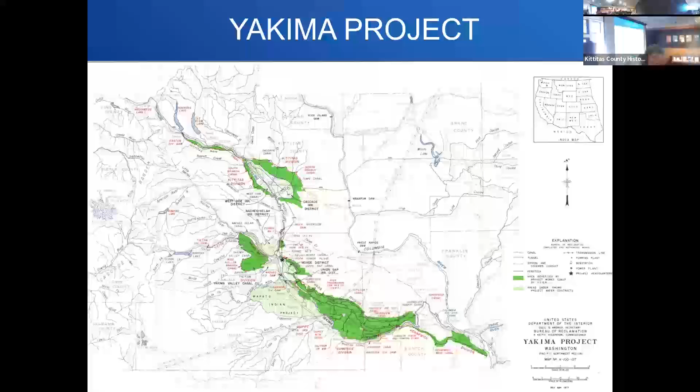The first one was the Newlands Project, hence the name of the document. But there were quite a few those first few years, and one of those was the Yakima Project, which was approved in 1905, but it took over 50 years to complete. It was completed in 1958.

As I mentioned, 6 irrigation divisions: Tieton and Sunnyside, Kittitas, Roza, Kennewick, and a storage division, which proposed 6 dam reservoirs.

And this project was the largest in Washington State prior to the Columbia Basin project, which is huge. It was planned to be 2 million acres, not that much now, but it is.

And when they built the Northern Pacific Railway coming through here on the Cascade Branch, which goes over Stampede Pass, they encountered a bunch of sub-irrigation canals and whatnot in the area around the lower Yakima Valley, right there where Union Gap is. And I know they use them here.

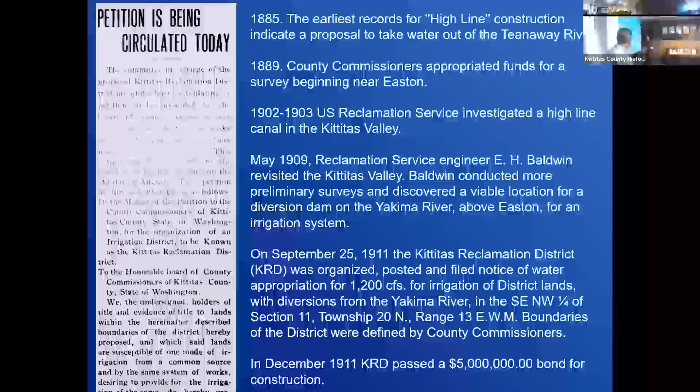On October 3rd, 1911, KRD hires Frank Kelsey to survey an irrigation system and provide engineering data and cost estimates, culminating in a report outlining the plan on March 15th, 1913. Frank Kelsey, from Portland, Oregon, came up here and surveyed all around. In anticipation of building this irrigation system, the KRD passed a $5 million bond for construction—think about that, $5 million in 1911, a lot more money than today. They voted 355 for the bonds and 24 against the proposed issue.

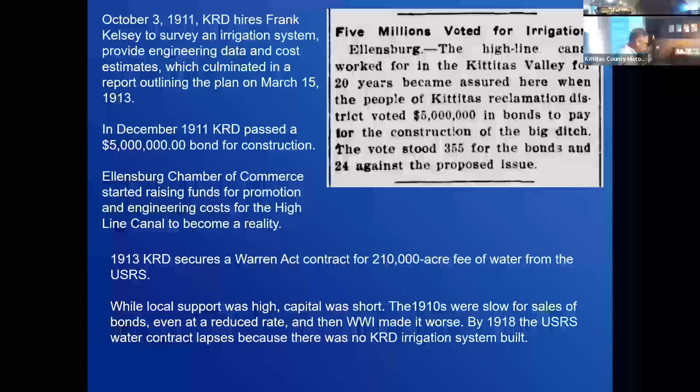Now, it'd be someone who was a government historian, I kind of know some of these things. So this Warren Act contract here, what this means is this is a private irrigation district that can contract for water from the federal government. By this time, they had Kachess Dam built, working on it, so they could secure water. It wasn't only for reclamation-built systems; people could contract with them, but they had to build a system, and they didn't, so it lapsed.

So what's the Kittitas Reclamation District to do now? They tried really hard. I want to implore you to realize how much the Chamber of Commerce did. They were continually fighting, doing publications, trying to raise money. I've never seen a Chamber of Commerce be so active in trying to get involved in the irrigation district to make it happen. But they just kept coming up short.

So in 1918, the Kittitas Reclamation District Board meets with R.K. Tiffany, the project manager for the Yakima project, U.S. Senator Wesley Jones, and Miles Poindexter, to petition the United States Reclamation Service to build a system. They said, hey, we think you guys should build it.

Then in 1920, the state of Washington gets involved and has H.R. Bottom, engineer, investigate various proposed plans. From this, the Kittitas Reclamation District hired engineer John R. Sherman to revise Frank Kelsey's original plans from 1912-1913.

Then in 1921, the Kittitas Reclamation District signs a new contract, this time for more water, 260,000 acre feet instead of 210,000. Again, as I mentioned, the Ellensburg Chamber of Commerce steps up, leads a Kittitas Valley community effort to subscribe monthly amounts to be paid until construction of canals was certain, and even hired Ora McDermith, the engineer, to lobby the United States Reclamation Service to build this project.

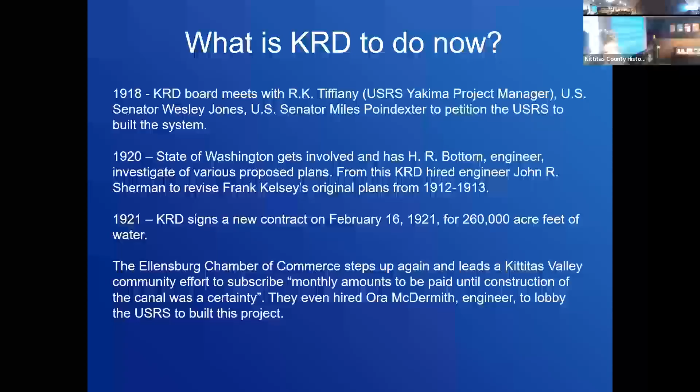They tried to get appropriations. We can talk more about that later, I wrote a history of the Kittitas Reclamation District. But they got some other ways to fill up funding than just self-funding.

So as I mentioned, finally in 1923 they got some more funding. The Bureau of Reclamation said, we have some money, and announced there would be money in the Reclamation Fund to build one more division of the Yakima project.

So now all of the different viable districts planned for the Yakima project were all vying, saying pick me, pick me. They came out and did a personal field trip by David W. Davis, Commissioner of Reclamation, and Frank Weymouth, the agency's chief engineer, to see which would be the remaining plan chosen. Kennewick was vying greatly for that, as was what would eventually become the Roza Irrigation District.

But luckily for Kittitas, they won out, they're the ones that were chosen. I'm doing a little history on the Kennewick Irrigation District too — they were quite bummed they did not get that. They were really hoping for it, and thought those darn Kittitas people beat us out.

So in 1924, a draft report was finalized, estimating construction costs in the Kittitas division at $9 million, and was deemed worthy of construction and development by the government. And, quote, while the repayment is long, the project is permanent and safe from an agricultural standpoint, exceedingly attractive from the viewpoint of health, educational, and social conditions, and considered economically sound and feasible.

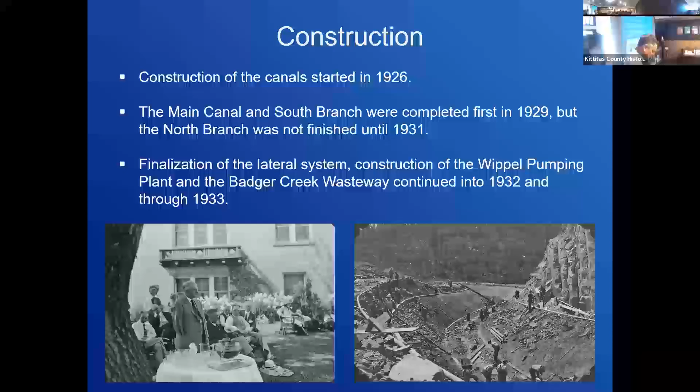And to the right, we see them already starting to trim rock, cutting in preparation for placing the concrete lining on the main canal.

Over 3.5 million cubic yards of earth were excavated for the main canal. Excavation crews worked either two 12-hour or three 8-hour shifts to get the work done.

Now interesting enough, it went through Easton, and Easton today is not a large populous city, but it still had many people at the time - of course the Milwaukee Road came through there, and then the Northern Pacific did too, and there was a turntable, not just a division point but a lot of activity there.

But there was enough there that when they built the canal, they had to move 3 houses, 9 sheds, and a barn - moved by a gentleman named Mr. Ferrier as they were in the way of the canal. And Reclamation had to take a bite out of Easton for this and had to move 1,000 feet of their water.

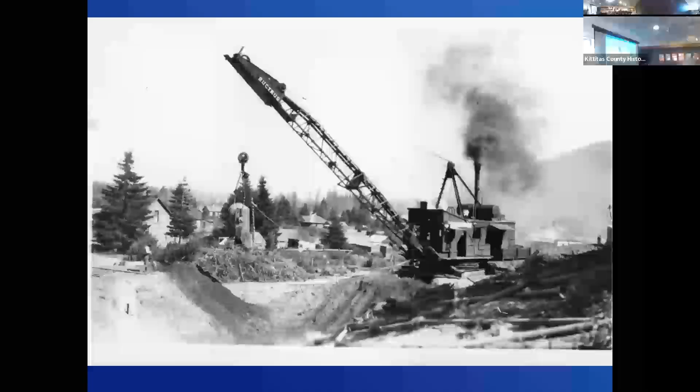So just to focus on some of the canals, I want to talk a little bit about the main canal. Reclamation didn't build it on its own. Reclamation has some projects they call force account, where the government was forced to do it - they couldn't do it any cheaper.

One of those was the Conconully Dam up in Okanogan, built around 1905 to 1910. Anything was shipped up to Wenatchee, then by steamboat, then by teamster to Conconully. There was no roads, no railroad, nothing. That was built before statehood.

But here it's different - here, many years later, they contracted out and did construction with 6 different firms to build the main canal, and over 1,500 men were involved in construction of the main canal total over time.

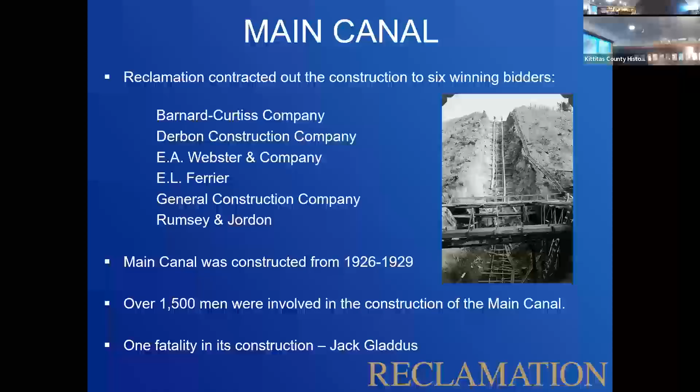There was one fatality in construction. It was Jack Gladdus, a gentleman from, I think, Roslyn, Upper County. That's interesting, something they don't talk about, but it does occur, especially in this era. But I believe that's the only fatality on the Kittitas division, Kittitas Reclamation District. I know on the Roza there were 2.

So on the main canal, we talked about at least 3 construction camps for housing the workers, about 1,500 people. It wasn't like Reclamation where they had their own camp. These construction camps were erected and operated by the contractor, above average as to sanitary provisions for the working man.

Wages for the workers varied from $300 a month for a superintendent with free room and board on the construction camp, to 50 cents an hour for common labor. Those who did not get free room and board had to pay $1.50 a day to stay in construction camp housing. I think there's not a lot of records.

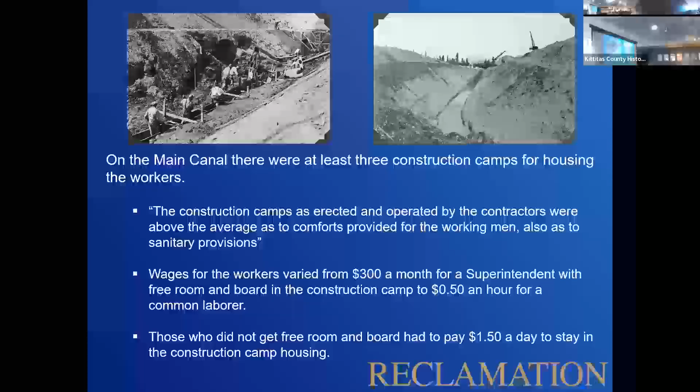I was speaking with a reporter from the Daily Record about an article on this presentation, and we really don't know a lot about who was employed and who was not. We have some instances and maybe some family and local history showing they worked on the project. But it's my conjecture that there were quite a bit of local people who came and worked on it, because at that time the economy wasn't the greatest - it wasn't the Great Depression yet, but then it came and people would be looking for work.

So here we see them building the form for the Peterson siphon - all that wood involved. Look how they're bending the wood to make the siphon go up and down.

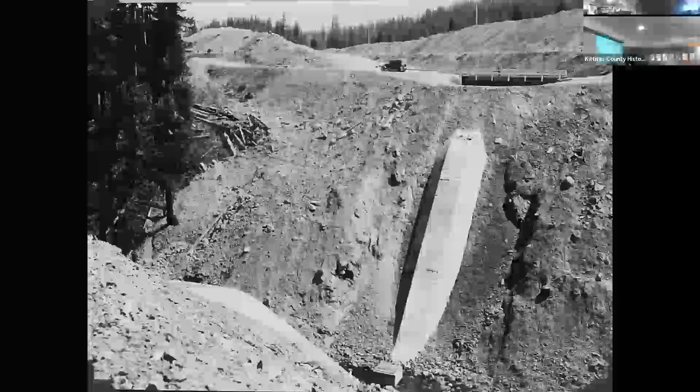There's another one. This is the completed view, and if you notice - we were talking about how steep some of these are - here's one part where the siphon goes down here, right back up like that.

Do you know where that's located? Oh, it's on the main canal. How far is it from Nelson Siding? Urban, do you know? Close to the golf course. Close to the golf course. Peterson? Yeah. 7-7, yeah.

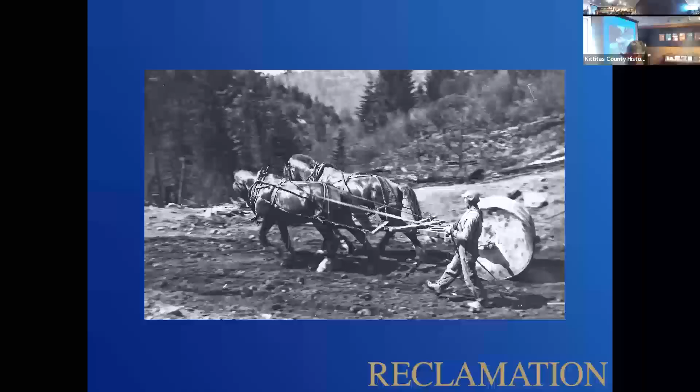So not only did they use machinery like we saw, giant steam power generators, but we also used horses - this is one of the last projects in the Yakima project built with horsepower. So you have horses here using a compactor.

Of course, we have the giant drag line. I always like this picture because it shows how massively huge this is. Here's - big. But we had horsepower, lots of use of horsepower.

We can see the horses being used for compacting canal embankments, pulling rollers over the earth - we saw that - plowing in the canal prisms on smaller laterals, and pulling skips of concrete mix, as you see on the terminal lateral in Badger Pocket.

So as we mentioned, originally this project was supposed to be $9 million. And those that came, talking to you, realized there was a problem. Eventually it came out and it cost $11 million to build this, after the pressure tunnel failed in 1931 because they had to fix it.

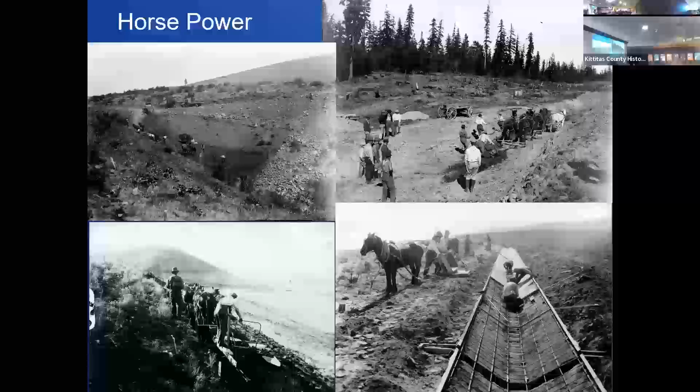So not only did we have excavators, steam shovels, drag lines, and horses - we also had tunnels, and there were several tunnels. They were hauled out with little tunnel electric locomotives. There was a gasoline powered one here. We see this at Rocky Point Tunnel - all kinds of activity.

And then, as I mentioned, something unique to this project was the graveled soils - compacted together so hard they could not be broken with available technology. An excavator or drag line couldn't break it below a foot, so they required considerable dynamite.

You see there, they set off the charges, and the dynamite would uplift this ground, but it was still huge - they had to keep pounding it with the dragline bucket just to break it up. This hard pan could then be hauled off. You see how big that is compared to the man. So we talk about machinery, we talk about animals, but we also have manpower.

This is a series of photographs that the Irrigation District has, which are really cool. These are ones that are not part of Reclamation's assigned photograph set, but they show the human element involved in this.

Every day during construction of the Kittitas Reclamation District's Kittitas Division canal, Antelope Canal System, a trainload of gravel crossed the mountains from Steilacoom, and every week a trainload of cement came from Washington cement plants, with trainloads of steel arriving for steel mills.

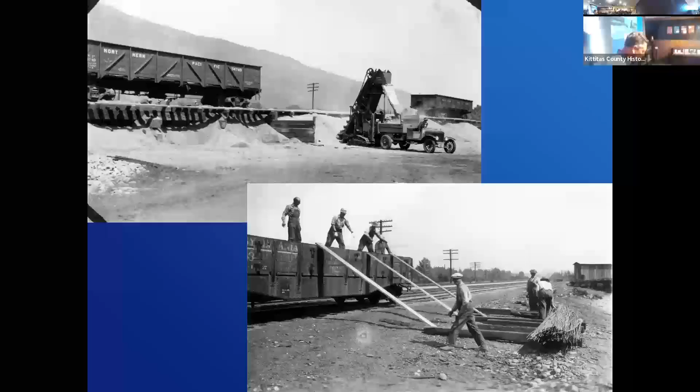And then we see the sand and gravel dumpster in Easton, and they were transferred to there.

And we talk about camp. So here's a nice picture. There's all the information on it because they were all run by different private companies that were contracted. Reclamation was, see the camp here, near Dry Creek Siphon.

There were over 1,600 workers on the payroll of the contractors at the peak of construction of the canal.

And it involved all kinds of unusual things for technology. So to me, this seems unusual. This is what they created, of course, siphons with all these forms, these wood forms.

Not unusual, but Kittitas Division involved more types and different forms of canal sections than any irrigation plant yet constructed in this county, or probably more. Probably one of the most expensive, covering so large an acreage, when it was built.

So the main canal has one tunnel under the now BNSF tracks and 10 siphons. The North Branch Canal has 5 tunnels and 7 siphons. South Branch Canal has 2 tunnels and 5 siphons.

And this was the last Yakima project division that was constructed with a manual concrete canal lining machine. The main canal had a motor operated machine to move the jumbo, but it was not fully automatic and did not form the concrete—people were still used.

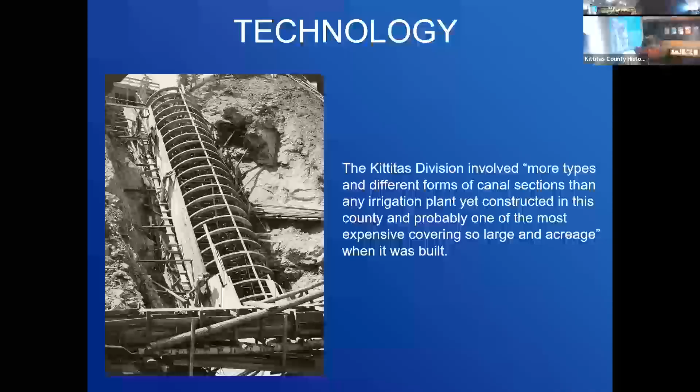We'll talk about that. So this is the machine that was developed in Seattle by the general contracting company, called the Kittitas Valley.

This machine was used, and I don't know if you can see how—we're gonna show some different photos of this, just different examples. They modified it, changed it. Different contractors said this is really cool, so they did the same thing, whatever they could do, because before this, they did it all by hand.

There's pictures I found down in the Sunnyside Division, the Sunnyside Canal—they enlarged it in 1909 and 1910, and they all did it by hand.

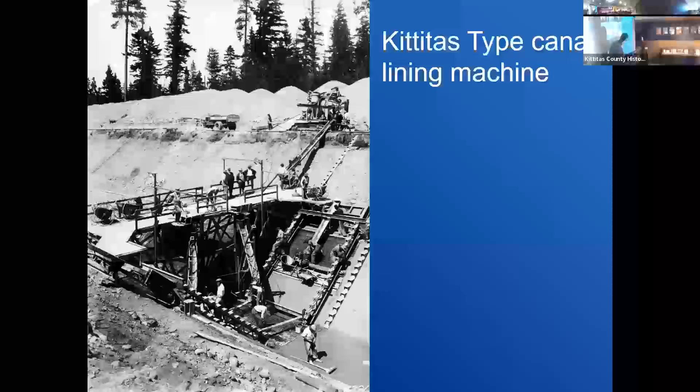They didn't have any sort of machine that would bring down concrete here and put it into a wheelbarrow. The wheelbarrow would come over and dump it down here, go down this chute, and then it'll go here, and then it should be slowly winched up by these gentlemen up the side there. So this would change from just being rebar and dirt to being a completed concrete panel.

So here's some other pictures of that. I mean, it is automated, but it's still a lot of hand use, a lot of manpower involved in it. You've got either this one goes to this side, and that one goes to that side.

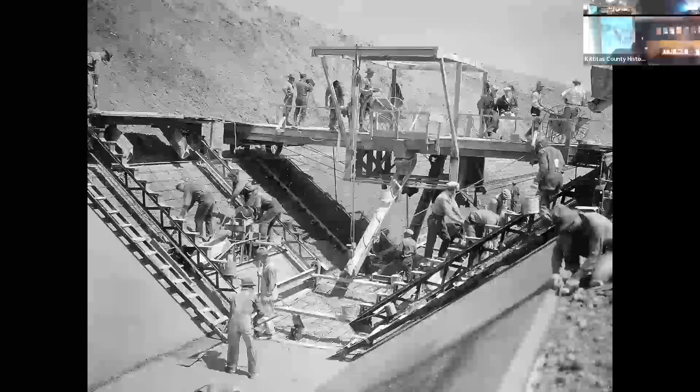Here's on the North Branch Canal. And so then we have all these siphons we talked about.

Here's Spexarth Siphon, it's 423 feet long. It's one of 7 concrete siphons that goes under creeks in the main canal. It constituted an outstanding example of modern engineering and construction resourcefulness.

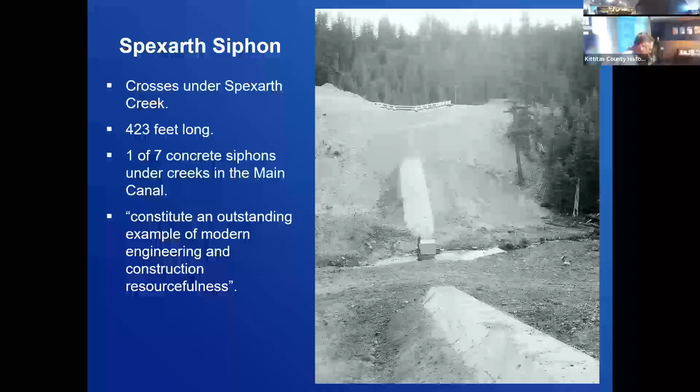Here's the culmination section near Morrison Canyon Siphon. Of course, this is empty, and it's there, standing there for proportion.

You notice that there are trapezoidal lined high wall bench flumes, half wall and rock sections, flumes with half straight angle sections, drop structures, and earthen line sections. So it's all these different types of things that compose the main canal, and no other Yakima project division has such a variety of design.

My favorite is Morrison Canyon Siphon. It's 552.3 feet long, a really cool riveted siphon, and that's the steel portion. The whole siphon itself is 1,049 feet long—there's a concrete portion on that.

It's one of 2 riveted steel siphons in the main canal, and as I mentioned, no other Yakima project division has these steel siphons.

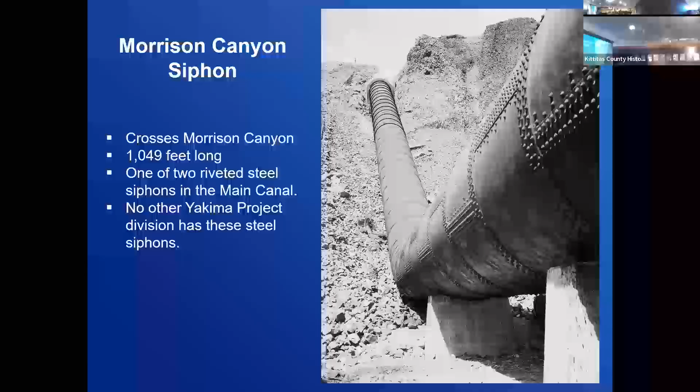Why are they called Morrison Canyon? That's the canyon that it crosses. That's a question more for the local folks, who knew why it's called Morrison Canyon. I'm not sure—there's Morrison Canyon, and the other one is Horseshoe Canyon. Those are upstream of this, Yakima pressure tunnel.

The tunnel located between main canal and the North Branch Canal is a reinforced and plain concrete lined tunnel located about 8 miles northwest of Ford. The Yakima pressure tunnel is 3,596 feet long, with an internal diameter of 111 inches. It delivers 925 cubic feet per second of water from the south side of the Yakima Canyon to the north side of the Kittitas Valley. When built, it went under 2 railroads, the Chicago, Milwaukee, St. Paul Pacific, and the Northern Pacific Railway, along with the Yakima River, Swauk Creek, and Highway 10.

Well, you two got to see that. Save it for next time.

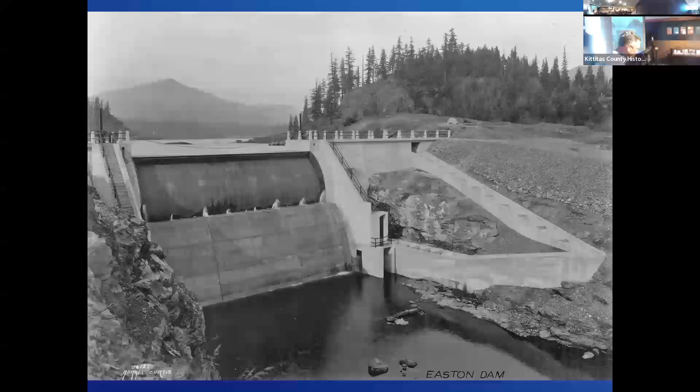Easton Dam is a concrete gravity dam with an ogee weir and movable crest. It's the only one of its type in the whole project. Another unique thing about the Kittitas Reclamation District is that it's the only type of dam on the whole project. I don't know if it's the only one in the United States - I know it's not the only one in the agency, there was one in the 17 Western states, but it's very unique.

With all of this and the use of concrete, Reclamation had to come up with an idea. Over half of that cost, $9 million, was in concrete - that's a lot of concrete. So they had to figure out where they were going to test it, what the best mixture was, and what the right thickness should be.

One of the things I found in reports is that they lined these canals. We talked about the lining machine, and they lined it about 2.5 inches or so. Afterwards they realized, oh, we should have done 3 inches - so they didn't line it up right.

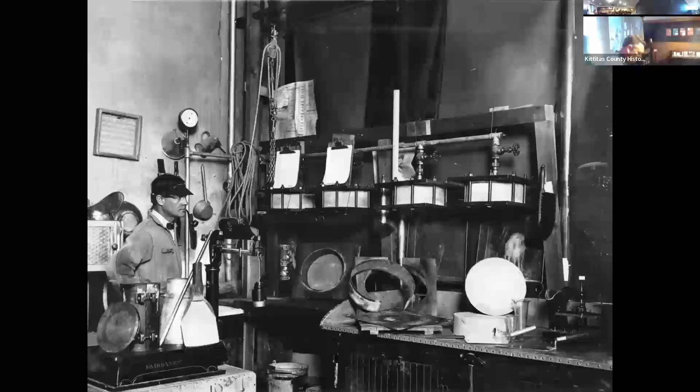But they had this testing laboratory in the Pearson building over that way. Reclamation had 160 employees here working on various things, measuring the impermeability of the concrete. Concrete discs were used as specimens for testing in the laboratory.

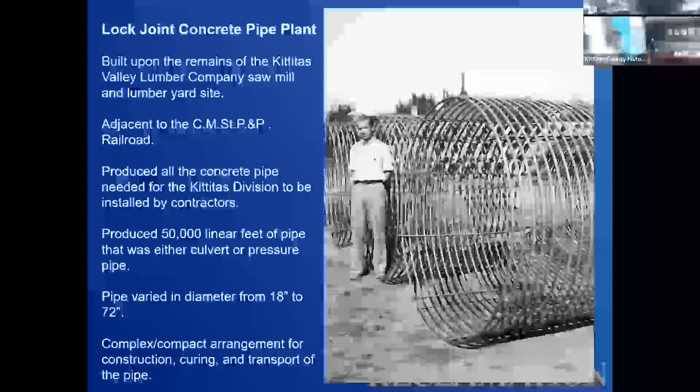And here are gentlemen working on all the rebar sections. So they had so much concrete, and they built a lot of this system - not only the big concrete siphons, the tunnels, and the metal siphons we talked about, but they also built things with lock joint concrete pipe. They had all this pipe, and some of it was actually done by government employees, on government account, force account.

It was built on the remains of the Kittitas Valley Lumber Company sawmill and lumberyard site, adjacent to the Milwaukee Road Railroad. It produced all the concrete pipe needed for the Kittitas division, to be installed by contractors. It produced 50,000 linear feet of pipe that was either culvert or pressure pipe, varying in diameter from 18 inches to 72 inches - there's still some of the 72 inch pipe.

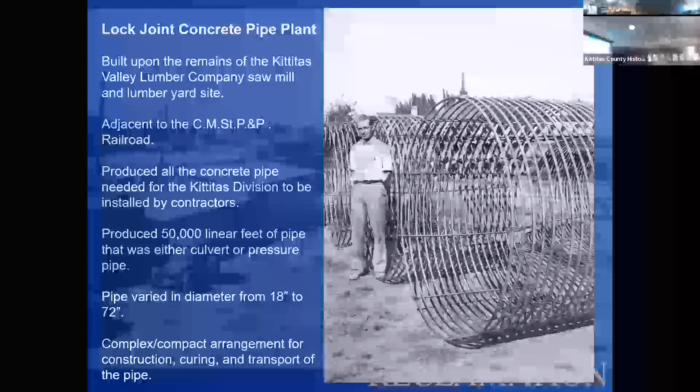It was a complex, compact arrangement for construction, curing, and transport of the pipe - something to behold. They had this facility, here it is. You can see the Milwaukee Road tracks - this part of the Milwaukee Road was electrified, there it is right there. This is where the sawmill was, and Reclamation made it into their concrete pipe making plant.

So there's one picture there, and here's another one - this is the curing yard, with all the completed pipe on the right.

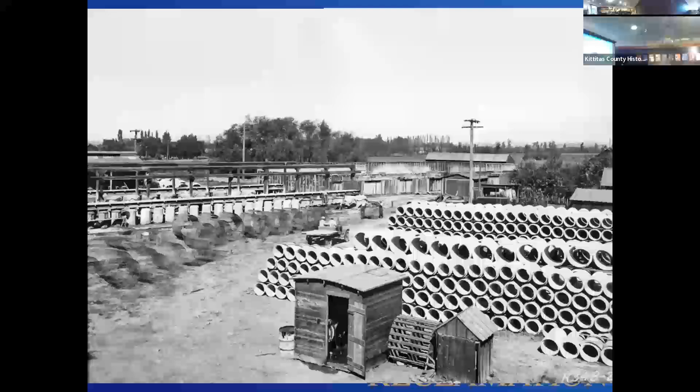Is this close to where the old depot is now? No, that's a question I had out earlier, was curious about. It turns out it's near Central Washington University - there's a pond that's still there. This was a sawmill, but all that stuff is gone. I have it located on a map, I'll bring it up, but we did figure out where it was at. You wouldn't know because no one really knew where it was. I don't want to misspeak without looking at that and say what street it was off of, but we did find out where it went - they rented it. There's a pond here where the CWU surplus is. That's it, yeah, that's the spot.

The lock joint pipe plant was constructed in 1928. The lock joint pipe was adapted as a standard concrete pipe by Reclamation, so they could not contract it out. Reclamation had essentially monopoly rights to that, and that's also when they built it.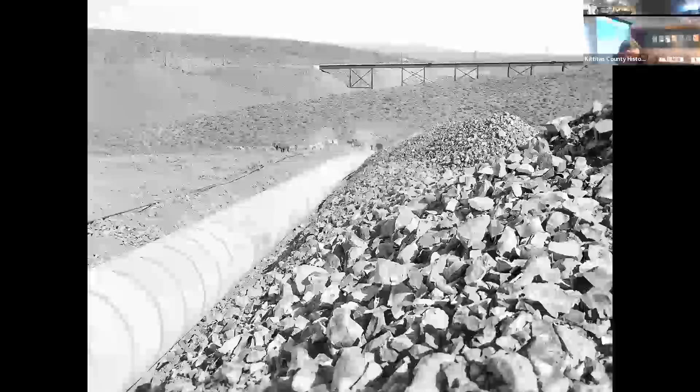Here we see some of that lock joint pipe in action being used, near Johnson Creek Raceway. This has actually come down - the hillside underneath Interstate 90 would go behind that little hill, and it comes up that way. It's all put together.

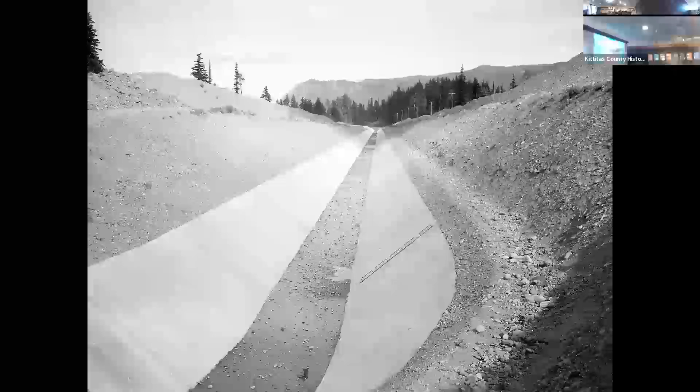Here's a completed canal, the main canal in 1929, showing all the concrete lining in there. So now they built the canal. Got to bring people. Got to get settlers here. Interesting enough,

the Kittitas Reclamation District and the Kittitas Division of the Yakima Project is also unique in that it was the first division that offered preferential treatment to veterans for land. They divided up the land into 63 farm units, and in 1933 they gave veterans preference for that. You didn't have that in the Sunnyside or Tieton divisions.

Starting in 1926, the Ellensburg Chamber of Commerce headed a multi-year publicity campaign funded by local donations that attracted over 1,000 inquiries per month from nearly 60 magazine and newspaper classified ads. So the Chamber of Commerce was really promoting this.

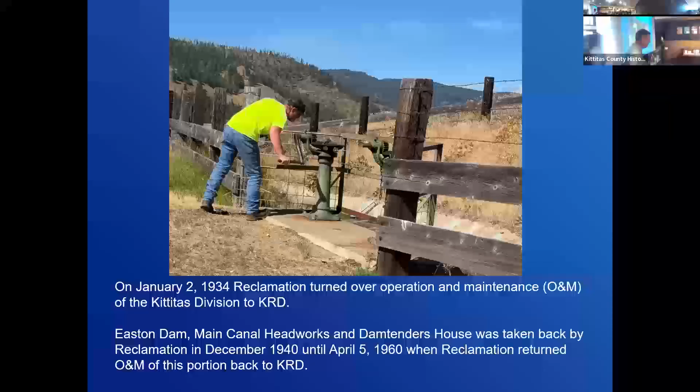But I don't know, it makes you wonder, because you know, there were inklings with World War II, you think, was there something going on there, national security related? Easton is a diversion dam, not a high dam, it's just taking the water that comes out of the reservoirs and diverting it. But certainly for KRD, it was great that they didn't have it in 1944, so it wasn't their fault.

But this did occur. So we had O&M, and O&M is something that KRD does on a daily basis, the ditch riders are out working on it, and then they have the maintenance crew and they deal with things. It's pretty much uneventful, except sometimes when something really goes awry.

So in 1953, we had a landslide caused by a break in the main canal, which caused 150 feet of the hillside to come down onto the Milwaukee Road tracks below the canal, carrying earth and trees to a depth of 5 feet or more, blocking the road for 24 hours. A 200-foot scar on the hillside was left from the landslide, which blocked both passenger and freight trains.

Rail was in danger of a complete washout as water was coming down the 300-foot high, quote, precipitous hillside in streams in places, just streams of water coming down, until the canal was closed off. KRD used the 1146 wasteway to divert all water out of the canal, into the river.

A 4-foot by 8-foot section of the canal lining settled, it turns out, when a 1 to 1/2 inch wide crack developed around the section where the water leaked. The lining was broken up and removed by the KRD drag line and patched to prevent further seepage.

On July 30th, it happened again. This time, KRD caught a 75-foot long crack in the canal that was leaking water before another landslide happened. As before, the floor of the section was removed and temporarily patched to prevent further seepage.

Once water was turned off after irrigation season was over, the KRD maintenance crew replaced the entire section of lining in the main canal. KRD, with the help of the U.S. Soil Conservation Service, also built, 100 feet below the main canal, a 1,300-foot long, 12-inch diameter tile drainage line to carry out any seepage.

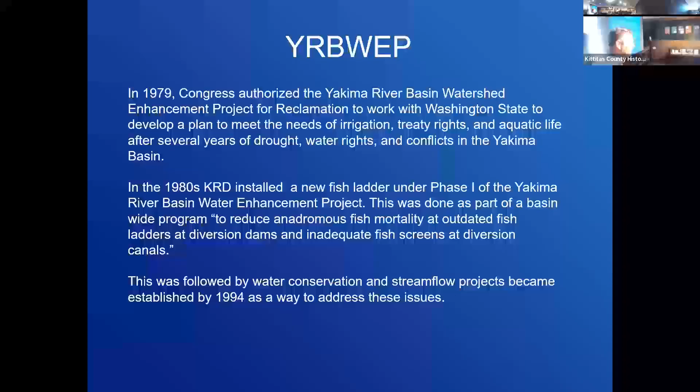Now, I want you to know, KRD helped build the gauging station. What do you think Reclamation contributed for that, in 1975? Any guess? Found it interesting - they contributed a door and a roof. So that's all they did. So they helped out, but not a lot.

In 1968, the construction of I-82 in Yakima, which still took a lot longer, took a chunk out of the turbine and Whipple pump laterals. It was also necessary to complete rerouting of the Whipple pump and turbine laterals, which should be relocated in pipes for 10,000 feet parallel to the new highway.

So now we get into the 1970s, when we have issues of drought. I can't remember exactly what year it was, but I remember by then I was a young child. Rimrock went dry - reservoirs went completely dry. And so we had continued years of that, we had issues.

In 1979, Congress authorized the Yakima River Basin Watershed Enhancement Project for Reclamation to work with Washington State to develop a plan to meet the needs of irrigation, treaty rights, and aquatic life after several years of drought. Water rights and conflicts in the Yakima Basin.

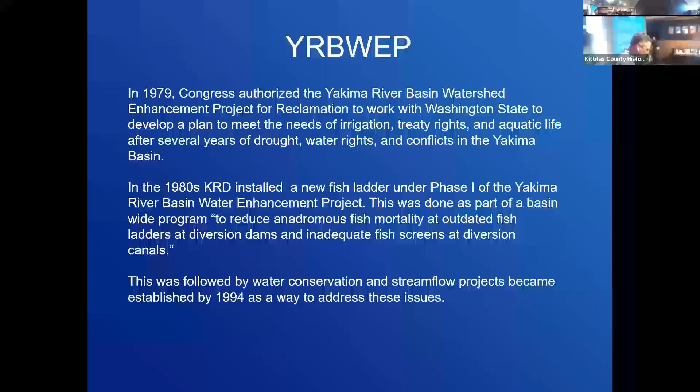So we're going to talk about some fun stuff that KRD is doing today. As we mentioned, Main Canal crosses all kinds of creeks. Here's a creek - 1, 2, 3, 4, 5, 6, 7, 8, 9, 10, 11. And so it crosses these all the way in, and they built these segments. And interesting enough...

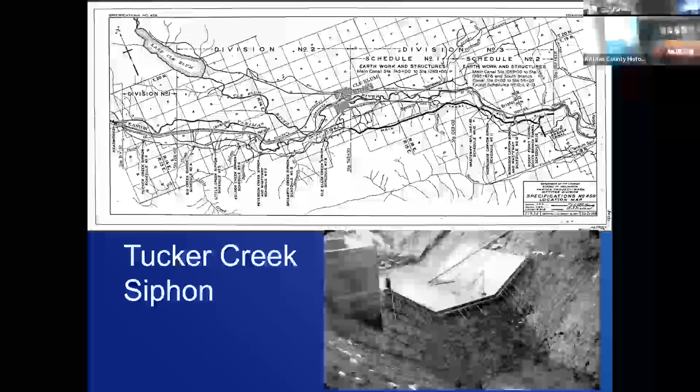In history, sometimes people long ago would do things like, why would you do that? They cut off things wrong. But Tucker Creek, here's an example, and they did build an apron over. So you see, here's the siphon going down and over, and they built this little concrete apron for the creek. So they didn't cut off water flow, but it still was somewhat hard for fish to grow up and go over. Here it is, here's that apron, here's the canal coming down like that.

I was talking to Erwin today, he said that this creek didn't already have a lot of water in it. What the KRD has done is they've worked with other parties and they've developed ways to, through the YRBWEP program, enhance viability of fish and other aquatic life.

They built a fish ladder, which I thought was really cool. It provides water to the creek below and downstream, so now the fish can go through this pattern all the way up over the top. This same area has this fish ladder on Walker Creek, and it's not the only one KRD is working on.

They've also done Big Creek and Little Creek, because they're big, strong siphons with a lot of pressure. They take the water out of the siphon just a little bit, turn it out and divert it into the creek, then later from the ladder provide full flow water to the Yakima River for the length of these creeks. Taneum Creek and Manastash Creek also take water from the siphon to provide flow for the creeks.

Future projects include Swauk Creek, where the Yakima River pressure tunnel is - they'll take water from that pressure tunnel and bring it 3.5 miles upstream to provide full flow there. So besides providing flow for creeks, streams, and aquatic life and fish...

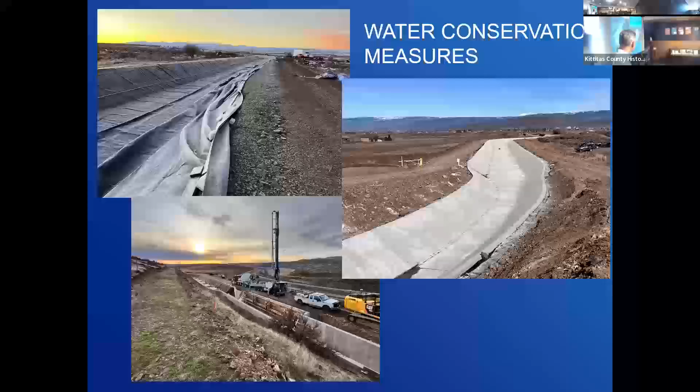Man, what do we do now? So these projects do need maintenance and upkeep, and I just want to give kudos to the staff today at KRD for all the work they're doing trying to improve their system and keep it running, delivering the water that farmers need. And that is the end of my presentation, so - any questions?